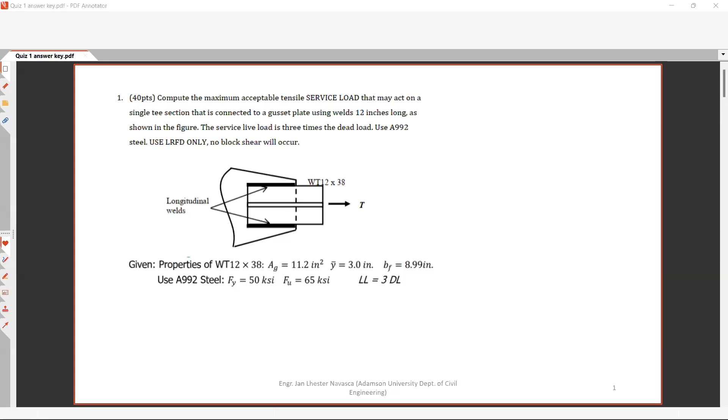Okay, so for situation 1, compute the maximum acceptable tensile service load that may act on a single tee section that is connected to a gusset plate using 12 inches long, as shown in the figure.

It was assumed that the service live load... what do you mean by service live load? The service live load, no factor, our live load, is assumed to be 3 times the dead load. Using A992 steel, using LRFD, assuming no block shear will occur.

This is true, there is no block shear that will occur. Okay, this is the assumption.

So, given properties, we have WT 12 by 38. Again, WT12, the 12 here is the depth of your WT, and the 38 is the unit weight per linear foot of your section. This has a unit of pounds per feet. So this means that this is 38 pounds per feet.

And you have a gross sectional area of 11.2, a Y bar of 3.0, BF of 8.99. A992 steel, Fy equals 50, Fu equals 65, and the assumption of LL equals 3 times dead load.

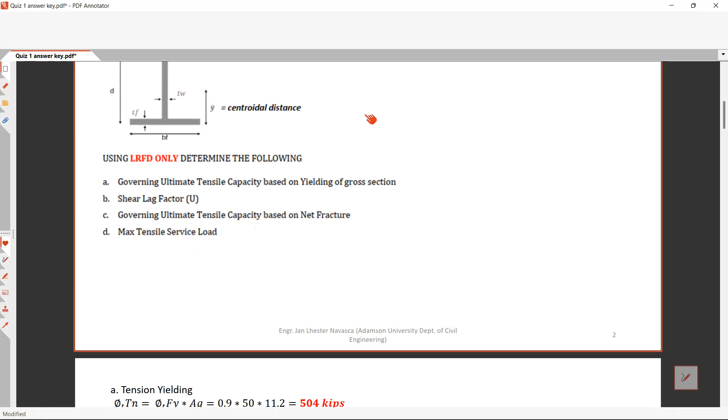Just find Fy, what is Ag, what is phi sub T, and directly you'll get the answer. Why did you still make mistakes here?

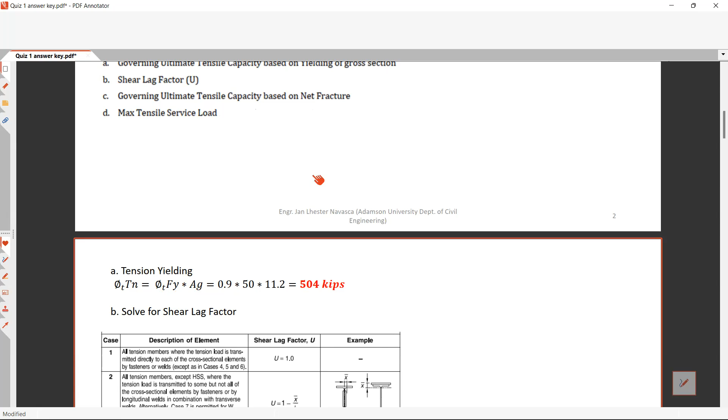So, phi Tn, tension yielding limit state, check your modules. Did you review? You have this phi in LRFD, assuming you are using LRFD.

Using LRFD, your phi in yielding is 0.9 and your phi in fracture is 0.75. So again, FY times AG, your FY is 50 KSI, your AG is 11.2, you get 504 kips. So that's a direct solve for problem A.

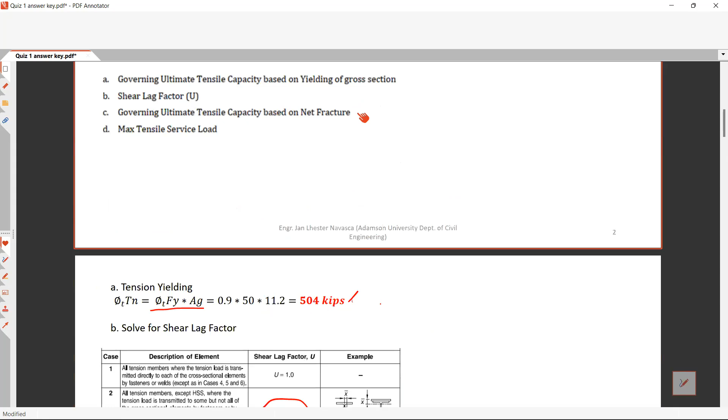For problem B, most of you use this 1 minus X bar over L. But this 1 minus X bar over L is not the shear lag factor that should be used here, because you have welded connections.

You have welds, and if you check the handouts that I've given to the class, you can see this case 4. There's a drawing here on the side. You have this example, and this example is exactly the same as your quiz.

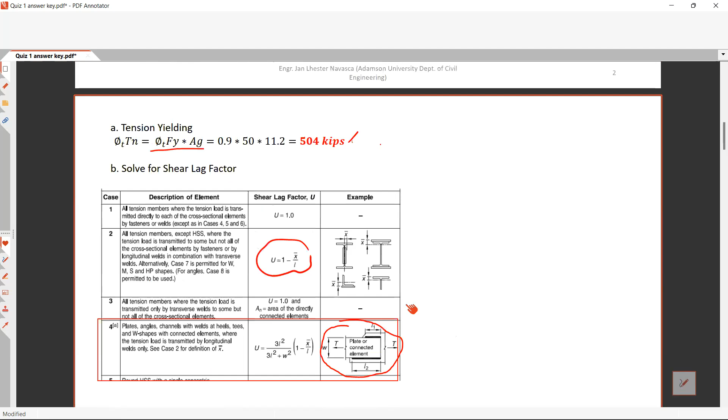That is exactly the same as your quiz. So you have angle plates, angle channels with welds at heels, tees, and W shapes, connected elements. You have this equation, so you will be using this equation.

Using this equation, just find what is L and what is X bar. Most of you got the L and X bar correctly. Your X bar is 3, that is also Y bar, 3 inches - that's the centroidal distance. And the length of connection is L.

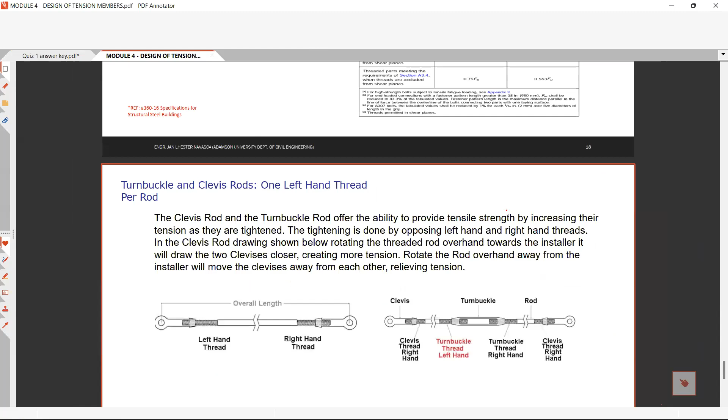If you check your handout - let me open the handout - designing tension members. If you check your handout, when welded, your L is this one. If they have different lengths, simply use the average.

That is why your L is 12 inches, since you have a 12-inch weld, and your X bar is 3 inches. That is why, plugging into the shear lag factor equation, you have 1 minus 3 over 12, multiplied by 3 times 12 squared over 3 times 12 squared plus 8.99 squared.

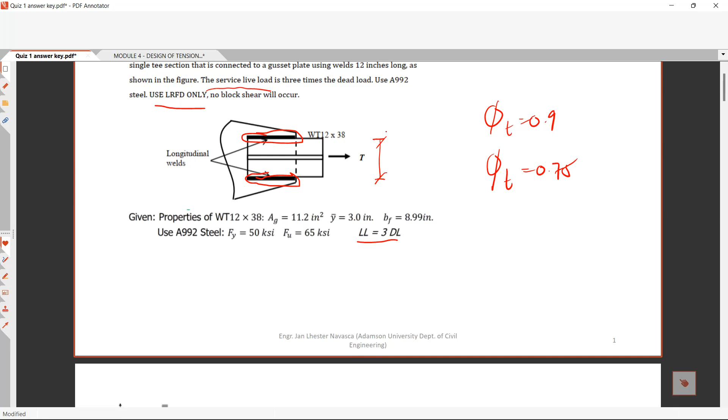What is W? Your W is the width perpendicular to the loading direction, that is BF, which is 8.99. If you look at the drawing, this is the loading direction, T, and this is W.

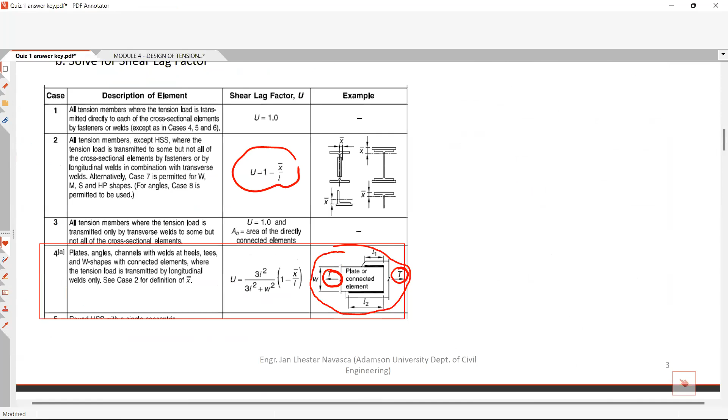So this time, you have this W, 3L squared plus W squared, times 1 minus X bar over L. Then you have this equation for the shear lag factor, which equals U equals 0.632. So now you have your A and B.

Now, what is the tension fracture, or what is the ultimate tensile strength in fracture? Again, your phi T is equal to 0.75 using LRFD.

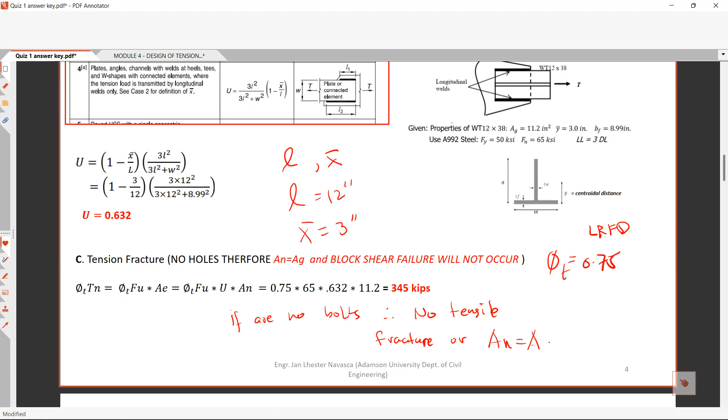Okay, so no holes. Again, as I said repeatedly in the lecture, if there are no bolts, take note, if there are no bolts, therefore no tensile fracture, or your AN is equal to your AG, okay? Your net area AN is equal to AG, and block shear failure will not occur.

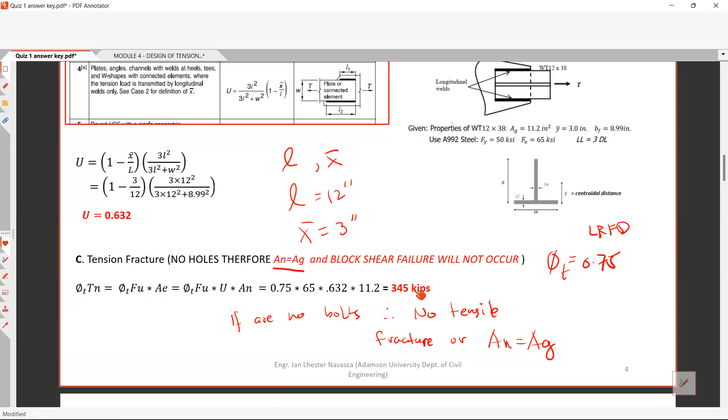This is the assumption. So you have 0.75 times 65 times the shear lag factor U times AN, which is 11.2, your AG, you get 345 kips. Okay, that is the tension fracture.

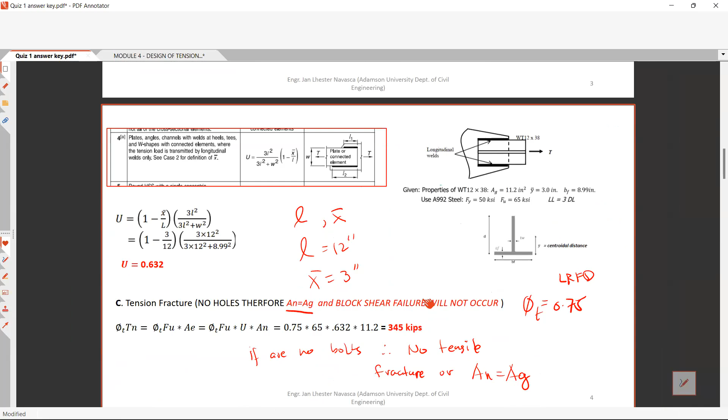Then the next problem is, what is the governing service load? Okay, going back to your two limit states, yielding and fracture. So for yielding, you have 504 kips, and based on fracture, you have 345 kips. Okay, therefore, choosing between the two limit states, we will choose the capacity with the smallest value.

So we'll be using 345 kips for the capacity based on LRFD. Okay, so it's simply equating the demand to the capacity. This time, this is your capacity, so we are solving for the demand. Again, the problem states that we will be using LRFD, so therefore we will use LRFD load combinations for the demand. Given that dead load and live load, you have these two load combinations.

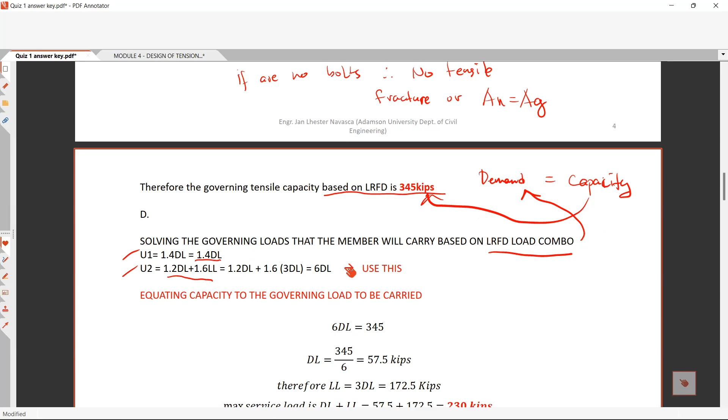You have U1 and U2: 1.4 times dead load, and 1.2 plus 1.6 times live load. Okay, then plugging in the assumption that your live load is thrice your dead load. Okay, so this is the assumption: the service live load is 3 times the dead load.

Therefore, plugging in, you have 1.2 times DL plus 1.6 times 3DL. You get this equation, 6DL, in terms of the load combination U2, 6DL in terms of dead loads. So comparing 1.4 DL versus 6DL, if you recall, for demand we will choose the maximum. Therefore, we'll be using the 6DL.

Now, equating the demand to the capacity, you have your 6DL equals 345. You get your dead load to be 57.5 kips. Therefore, 3 times the dead load, that is your live load, is 172.5 kips.

The question is asking what is the maximum service load. If you recall, the service load is simply dead load plus live load. It's simply 57.5 plus 172.5. You get 230 kips for the maximum service load.

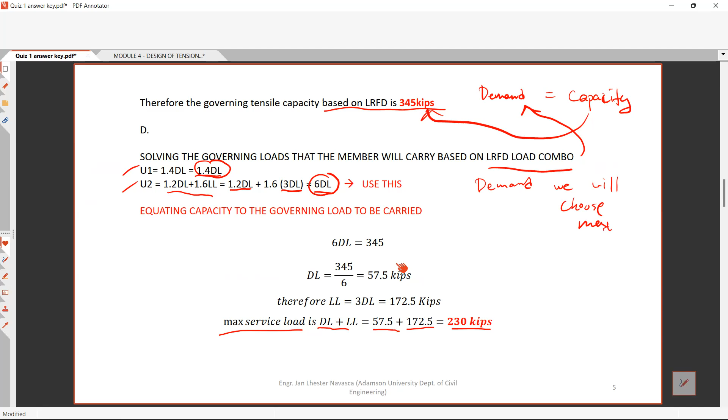Okay, so I think it's not that hard. So do you have any questions, class? Any clarifications for this problem? None so far, sir. Okay, I hope so.

Okay, Situation 2. Okay, someone also made a mistake here. So this situation 2 is almost the same as the given example in design of tension members. So I wonder why some still made a mistake solving this type of question.

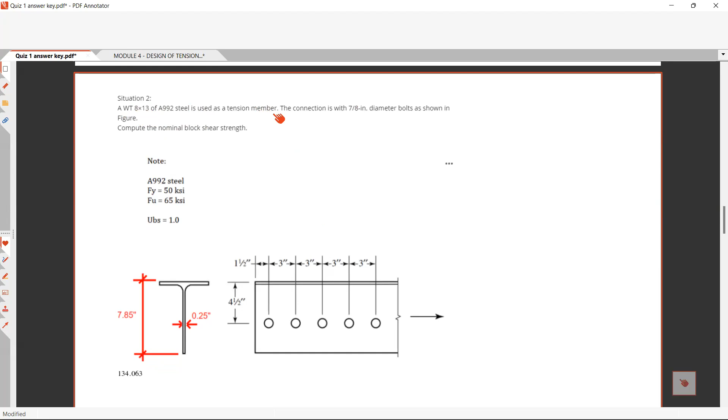Okay, WT 8 by 13, meaning you have your 8 by 13 WT section with A992 steel as the tension member. Okay, the connection is for 7/8 inch diameter bolts. So as shown in the figure, compute the nominal block shear strength. Okay, so we have this A992 steel, we have your FY, FU, and the assumptions UBS. Given the section, the answer is 134.063. Okay, how do we solve this type of problem?

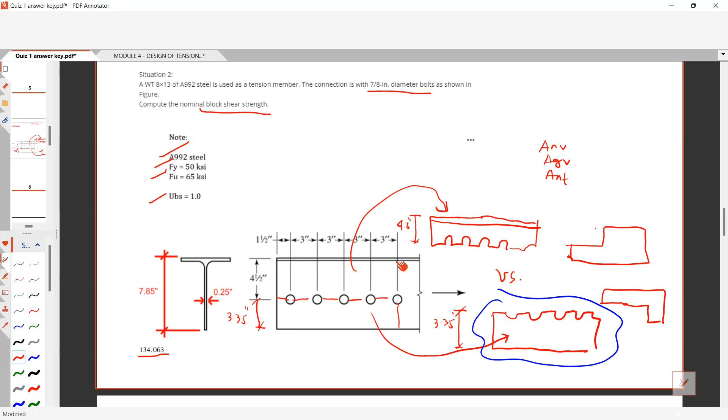So therefore, this is the block shear. This is the block shear that will occur. This is the governing block shear. Then for the solution, the shear area for AGV is just simply taking this total length.

So again, your thickness is 0.25. You have this length 1.5. So you have 1.5 plus 3, 1, 2, 3, 4, four times 3 inches. That is 13.5 inches. This is 13.5 inches.

That is why you have your AGV to be 3.375. Next, there are 4.5 hole diameters. You have 1, 2, 3, 4, and the last hole is torn off by its half. So it will tear off at the half.

Therefore you have this area, AGV, which is this one, minus the 1/2 hole. There are 4.5 hole diameters. You have your 4.5, then the hole diameter is dB plus 1/8 equals dH. Therefore you have this 2.25 square inches.

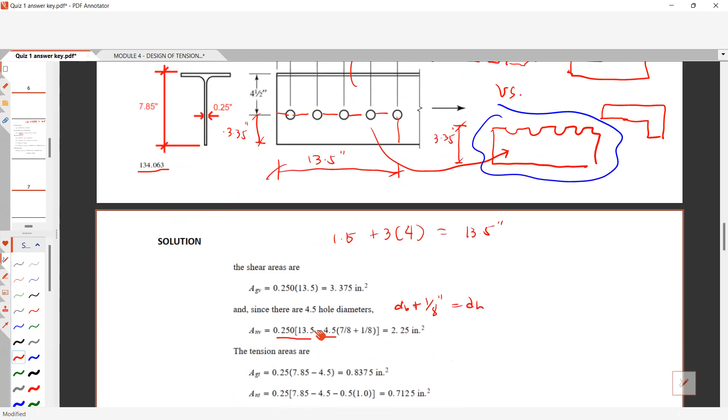And then for the tension area, it's just simply AGT, which is 0.25. You have your 0.25 thickness times 7.85, minus your 4.5.

Or this one is just simply 3. We solved this earlier, this is simply 3.35 inches. So 3.35 inches minus 1/2 of diameter of the hole. So 3.35 inches minus half of diameter of the hole, you have this 0.5 times 1. Again, in 3D, this is how it looks.

2, 3, 4, then the last is half. This one, this one.

This is the shearing area again. This one is ANT, and this is your, and this half area is your AGB. This one, this one.

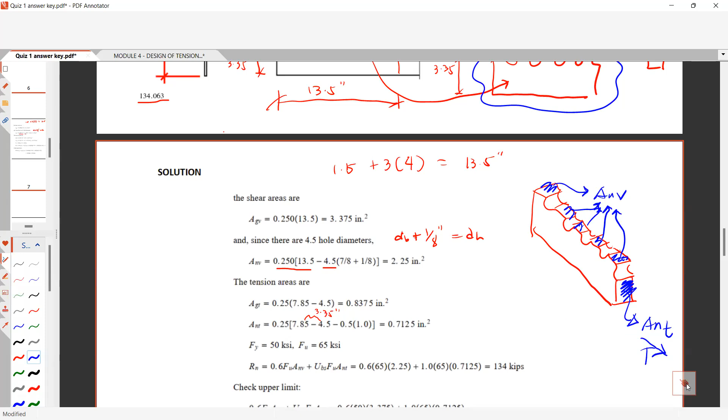So you have a force T over here. That is this one. Again, you have your ANT to be 0.7125. The thickness of this one is 0.25 inches.

So for the FY and FU, you have 50 KSI, 65 KSI. Therefore, your RN is 0.6 FU ANV, plus UBS FU ANT. You have this 134 kips.

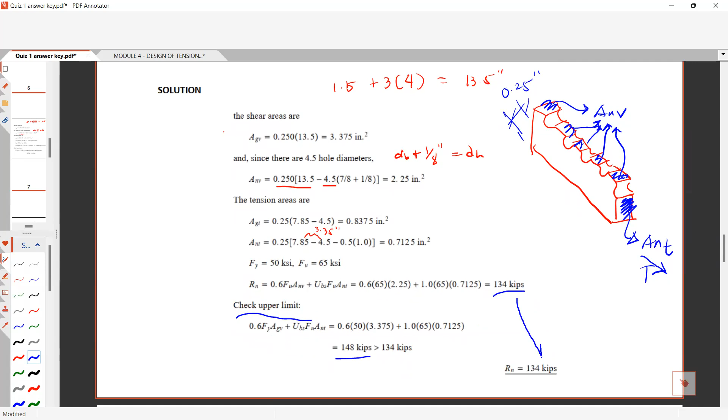Then checking for the upper limit, you have 0.6 FY AGV, plus UBS FU ANT. That is 148 kips. Since your value of Rn is less than the upper limit, therefore we'll be using this 134 kips. That is why you have your Rn to be 134 kips.

Again, the problem is asking for nominal. Therefore nominal means no resistance factor, or no factor phi or gamma, omega for ASD. So this phi is for LRFD and this one is for ASD. No factor of safety, in other words.

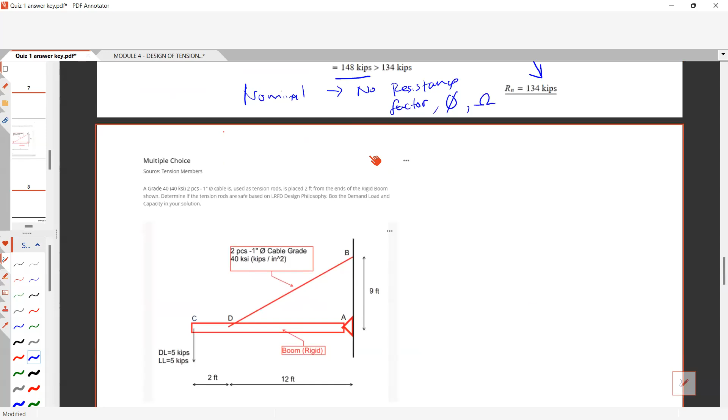Next problem is this one. This is the easiest problem in your quiz. Using your grade 40, or 40 KSI, 2 pieces of 1 inch diameter cable, this one serves as your tension rods.

It was placed 2 feet from the ends, using this rigid boom. Determine if the tension rods are safe based on LRFD design philosophy, and box your demand, load, and capacity in your solution. Then solving for this one.

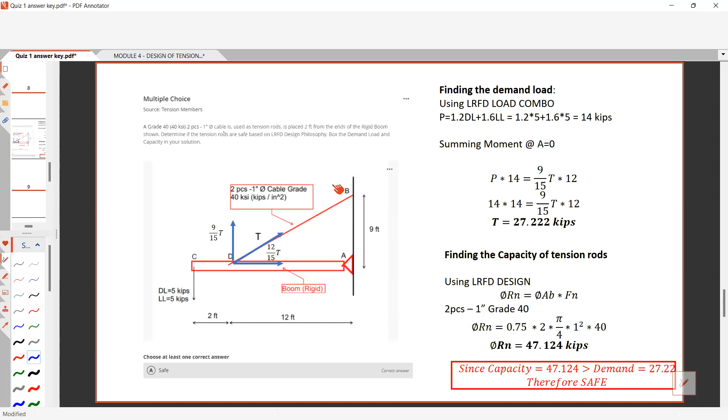I know you can do summation of forces. So find the tension T, that if you cut a section here, the tension T will come out. And that tension T has two components: you have this 12 over 15 T and 9 over 15 T.

Where did the 15 come from? It's just simply the hypotenuse of 9 and 12. So I know you can understand this horizontal and vertical components. Then again, using the finding the demand load and using the LRFD load combinations.

You have this 1.2 dead load, 1.6 live load. Therefore, you will be using 14 kips. So therefore, this assumption is 14 kips when you use the LRFD load combinations.

Then summing moment at A equals 0, since this is a hinge connection. So summing moment at A, you have this P times 14, and this vertical component of T is the only one that has moments about A. Therefore that is 9 over 15 T times 12. Then solving for T, you have this 27.222 kips.

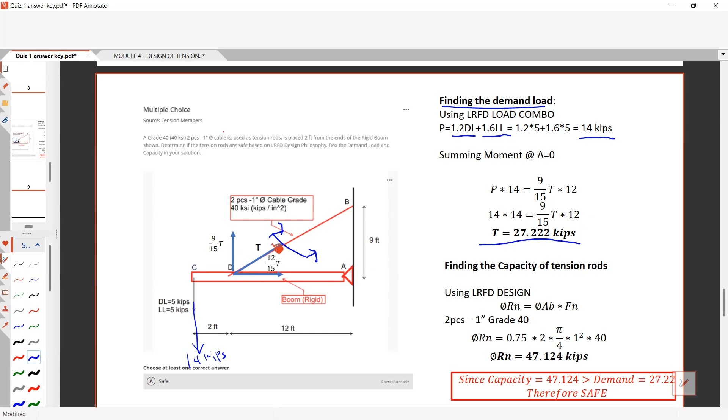Meaning that the tension for the 2 pieces of cable is 27.222 kips. Then solving for the capacity for the tension rod, if you're using LRFD design, this one, the tension rod in our module 4.

Okay, so Rn, Fn, AB for phi 0.75, given the Fn which is 40 ksi. Therefore phi AB times Fn, 2 pieces 1 inch diameter grade 40, 0.75 times 2 pieces times the area of the tension rods or the cables multiplied by the Fn which is grade 40. Therefore you will have 47.124 kips.

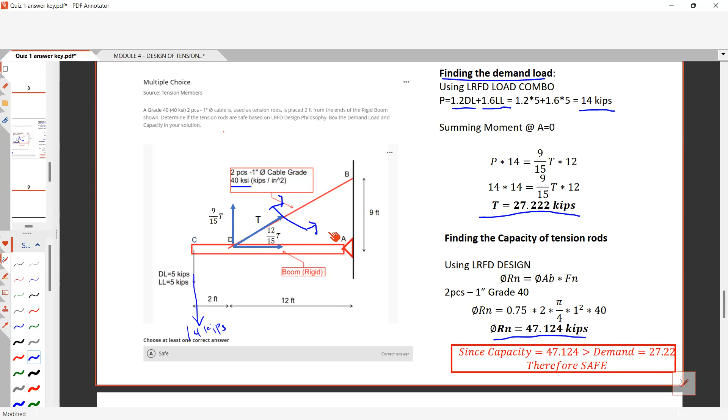Now comparing the capacity to the demand, since the capacity is greater than the demand load, therefore your cables or your tension rods is safe.

Okay, last problem: you have this channel bar C6 by 13 used as a tension member. The holes are for 5/8 inch diameter bolts using A36 steel with Fy equals 36 and Fu equals 58. The gross area is given and assume U equals 0.85. Using LRFD, what is the design? Tensile rupture or fracture, LRFD again.

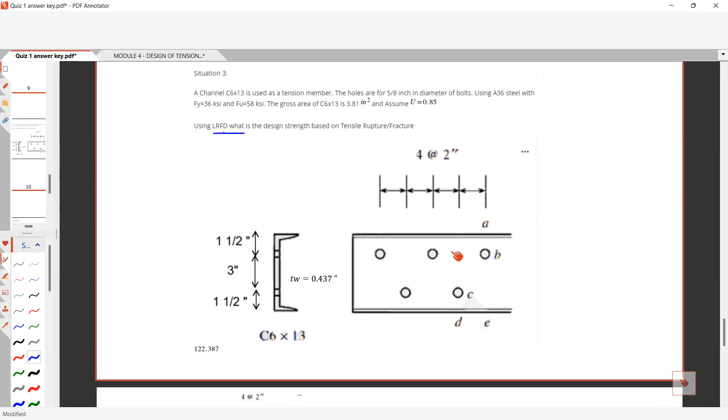Okay, given the setup, you have this staggered connections. If you have staggered connections, therefore your An is equals to Ag minus the area of the holes plus the correction factor, which is summation of S squared over 4G times thickness. Sana naalala niyo to.

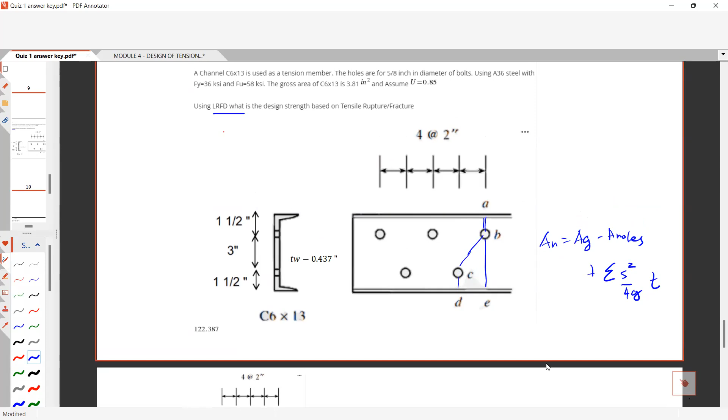You have this staggered connections. Kaya kung meron letters dito, that is why I have letters. Gusto kong magbigay sa inyo ng hint, yung mga loading path. So we have this loading path. Considering the bolt hole diameter, that is 3/4 inches. So solving for line ABE, the line ABE is this one, ABE.

So simply An is equals to Ag minus the area of the hole, which is T W times D. You have this An. Then considering the line ABCD, which is ABCD. So now you have a diagonal fracture, this one, diagonal fracture.

Therefore you will be using summation of S squared over 4G, or the correction factor. So you have this load T. This is your S, and this is your G. So that is why you have this TWD for the hole at B, TWD prime for the hole at C. You have this 3.81, which is your Ag, minus TW for the hole at B. This one is for the hole of B. This one is for the hole of C. And the correction factor, summation of S squared over 4G.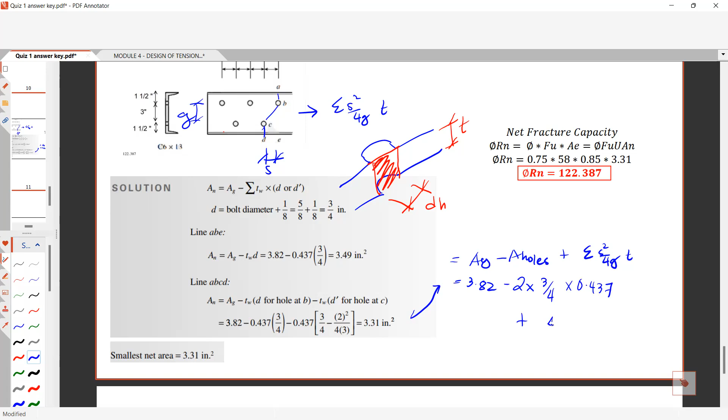Okay, so this one, for example, this is again the area that will be used, this area over here. This is the diameter of the hole, and this is the thickness. So that is why your 2 times diameter of the hole, which is 3/4, multiplied by the thickness 0.437, plus how many diagonal fracture? You have this only the line BC. Therefore you have S squared, which is 4 squared... you have 2 squared, your S is 2, over 4, your gauge distance is 3, then your thickness is 0.437. You have this value 3.31.

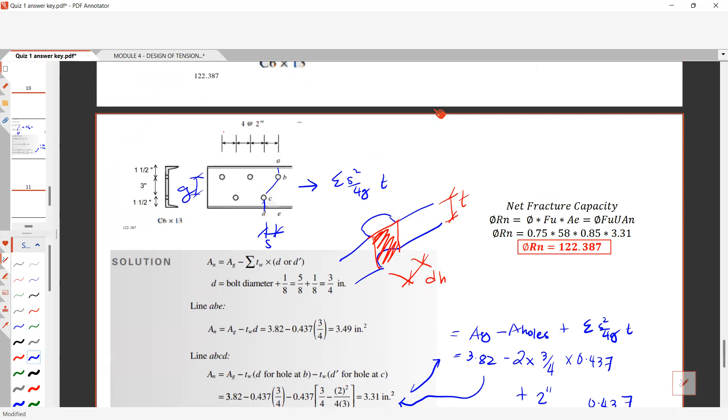Now considering the smallest net area, comparing the line ABE versus the line ABCD, the smallest net area is 3.31. Therefore the net fracture capacity is Phi times Fu Ae. Your Ae is U times An. You have your An, which is 3.31, this will be your net area. Then you have your assumption for shear lag factor, which is 0.85. You have the value Rn equals 122.387 kips.

Okay, so do you have any questions? This is designing, sir, tension member only. Okay, ano yan?

Tanong lang din po, sir. Ano po yung pinagkaiba, sir, sa formula na Wn equals to Wg minus yung diameter of holes minus number of stagger. Ano po yung pinagkaiba nun?

Okay, yung pinagkaiba doon, okay, for the sake of Mr. Ong, the difference between that net width, okay that is for net width, and this one is net area, An. So net width is just simply your An divided by the thickness. Kung mapapansin niyo class, lahat yan may thickness.

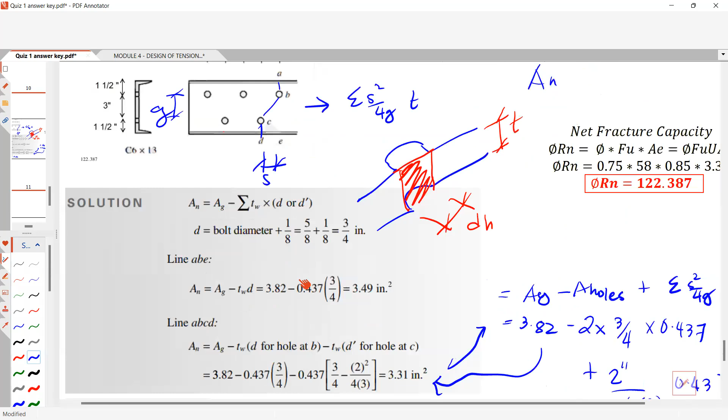Parang finactor out lang yung thickness. Finactor out yung thickness. Okay, yung sa Ag mo may thickness din yan. So that is net width. So in other words, they just have a relationship, or they are almost the same, since net width is finactor out lang yung thickness.

Okay, so you just took the length. You just took this length. What is the length from A to B? What is the length from B to C? What is the length from C to D? Net, meaning this part with the hole, based on my drawing, A to B, B to C, and C to D. Then you just multiply it by the thickness.

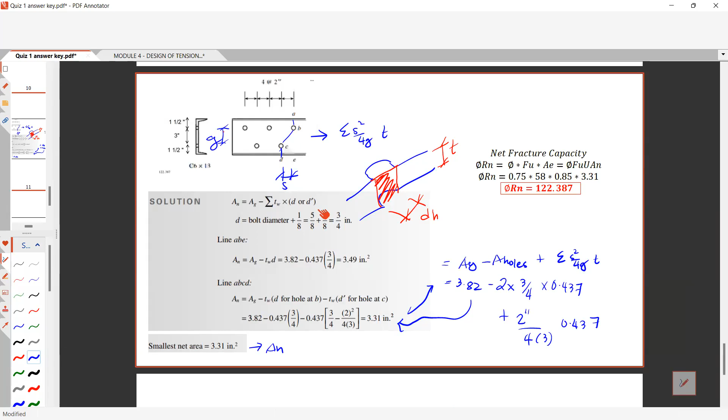Okay, but you can easily check this on C6 by 13. If you try, let's say, this one, C6 by 13 dimensions.

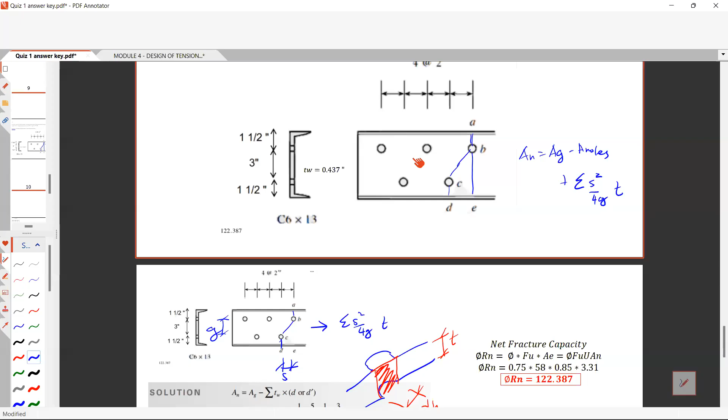You can easily check in the internet the web thickness, 0.437. So I think it doesn't matter if I included it or not. You can easily, if you really know what to use in the formula, check the C6 by 13 dimensions and properties. So I will still consider this situation 3 problems.

Okay po, sir. Thank you.

Okay, but sure, so that you won't have a hard time, please message me if I forgot something to add, but you can check it on your own if you use this one, if you just search for the name of the section.

Okay, any more questions, class, before we move on to designing compression members using Euler's formula?

Will you upload this discussion also in the Google Drive, sir? This one, the discussion of our quiz.

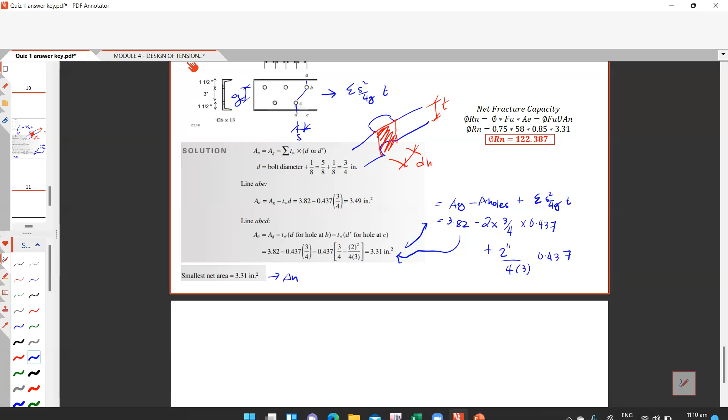Okay, let's move on. We only have 40 minutes left. Okay, so for module 6B, module 6B, example problems on Euler's buckling stress.

Again, this Euler's buckling stress is only the basis of designing an LRFD or the recent codes. Okay, so many designers today are still using this theory. Even in the board exam, they still give these problems, even though this way of designing Euler's buckling stress is already old.

Okay, so in summary, in our discussion last meeting, okay, the critical compressive stress or the Euler buckling stress is given by this equation: pi squared E over KL over R squared, this is your critical compressive stress. Again, this is stress. So if FCR is greater than Fy, your limit state is yielding.

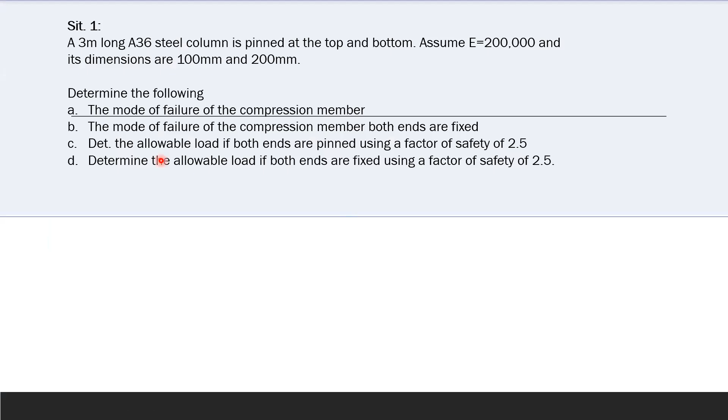Again, we have 3 meter long and 100 by 200 dimensions. The first assumption is both ends are pinned, so that is why you have your fixity factor that is 1.0.

Then solving for letter A, according to the problem, what is the failure mode? In order to solve for mode of failure, you just need to find the governing slenderness ratio. Solving for slenderness ratio in X, you have KL over Rx, which is 1.0 times 3,000 over square root of I over A. Your inertia is BH cube over 12.

If you recall, the inertia of a square or rectangle is BH cube over 12. This is your inertia in X, and your area is BH. So you have 100 by 200 cube over 12, and your area is 100 by 200. Therefore your slenderness ratio in X is 51.962.

Then solving for the slenderness ratio in the y-axis, you have KL over Ry, so 1.0 times 3,000 divided by square root of Iy over A. If you recall, the inertia in y for a square is b cubed h over 12. So you have 100 cubed times 200 divided by 12, divided by the area which is 100 by 200.

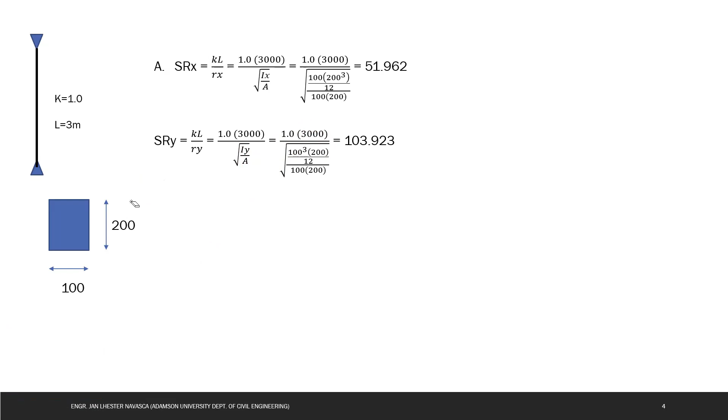Solving for FCR, which is the given problem, what is the mode of failure? FCR is pi squared E over KL over R squared, using the governing slenderness ratio. So your FCR is pi squared E over KL over R squared, which is 182.77. The governing slenderness ratio is the maximum slenderness ratio for X and Y axis.

So we will choose the maximum. Okay, this one. Therefore, your FCR is 182.77.

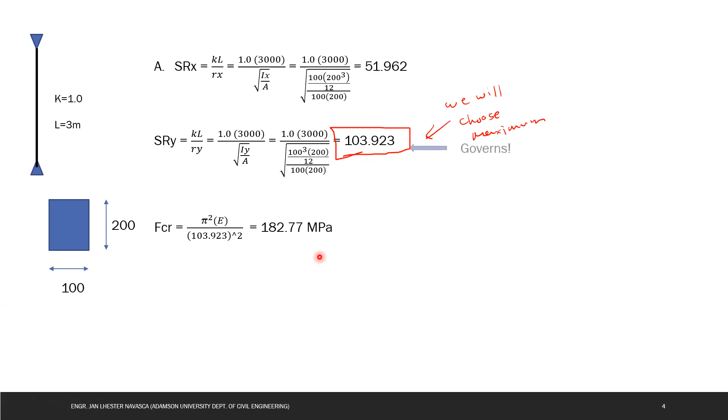If you recall, the Fy for A36 is 248. So basically, how to convert KSI to MPa. Given the problem, your Fy is equal to 36 KSI. To convert 36 KSI to MPa units, just multiply it by 1,000 and divide by 145. So 36,000 divided by 145 is exactly Fy equals 248 MPa.

Since the Euler buckling stress is 182.77, and that is less than the yielding stress, therefore the buckling stress will happen first before the yielding of the cross section. Therefore, the limit state is buckling. So that is why you have this answer: your limit state is buckling.

Next problem, what is the limit state if both ends are fixed? If you recall, the fixity factor if both ends are fixed is K equals 0.5. Then solving for the slenderness ratio in y and x, you have 0.5 times 3,000 square root of Iy over A, giving 51.962.

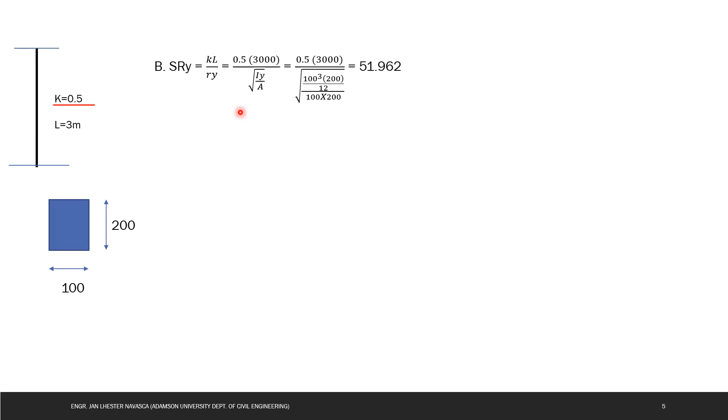No need to solve for SRX because we all know that SRY will govern. So that is the slenderness ratio in y that we solved. Then solving for FCR, pi squared E over KL over R squared, you get 731.068.

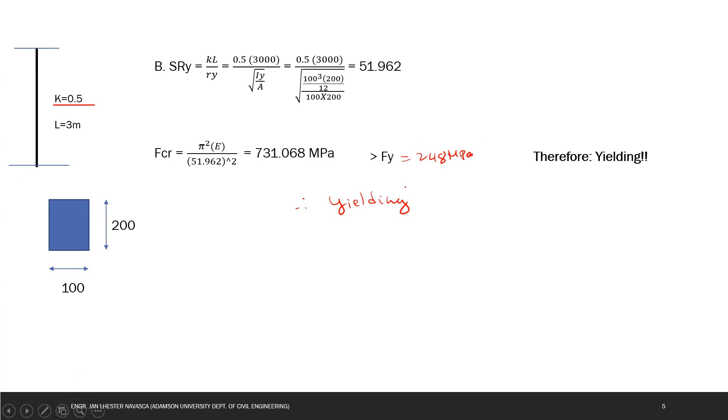Now comparing this critical buckling stress based on your Euler formula, that is greater than Fy, which is 248 MPa. Therefore, yielding will happen first, or the column will yield, and maybe the column will not buckle if the stability of the column is not enough. Therefore, the limit state will be yielding.

So it's like that, just check which happens first, whether buckling based on Euler buckling stress, or yielding based on Fy given in the properties.

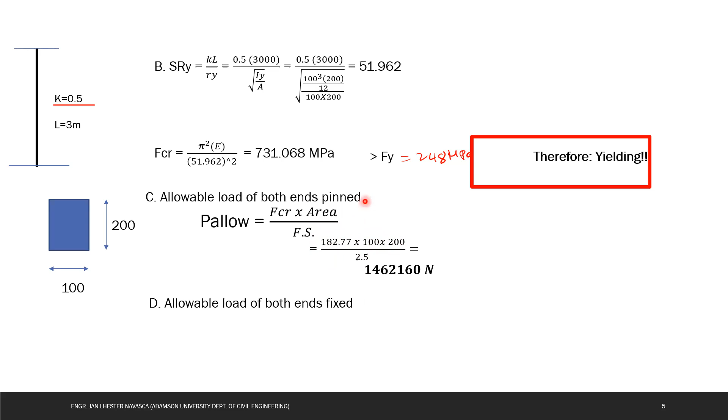Next problem is problem C: what if both ends are pin? What is the allowable load? So basically, you have your FCR times area divided by the factor of safety. That is your allowable load using a factor of safety. So you have the FCR given in problem A, the governing FCR if both ends are pinned, which is 182.77, multiplied by the area, divided by the factor of safety, giving 1,462,160 newtons. Then allowable load if both ends are fixed.

So again, the governing stress is Fy since yielding is the limit state of column if both ends are fixed. So Fy times area divided by Fs, you have 1,984,000.

Additional question: given these two allowable loads, with the same factor of safety, we will choose this one because this will give us a lower value for the capacity.

So next problem, situation 2, given in a past board exam: an 8-meter long steel column is pinned at the top and fixed at the bottom. The column is provided with lateral support at the mid-height in the weak direction. Take note of this problem. According to the problem, the designer provided a lateral support at the mid-height for the weak direction.

Using the Euler critical load PC equals pi squared EI over KL squared, and the properties of the column: IX equals 178.1 times 10 raised to 6, and IY is 18.8 times 10 raised to 6, and your area A is 8129 square millimeters. What is the critical effective slenderness ratio? Calculate the critical load PC. And determine the minimum length of the column for which the Euler's formula is valid if the proportional limit of the steel is 320 MPa.

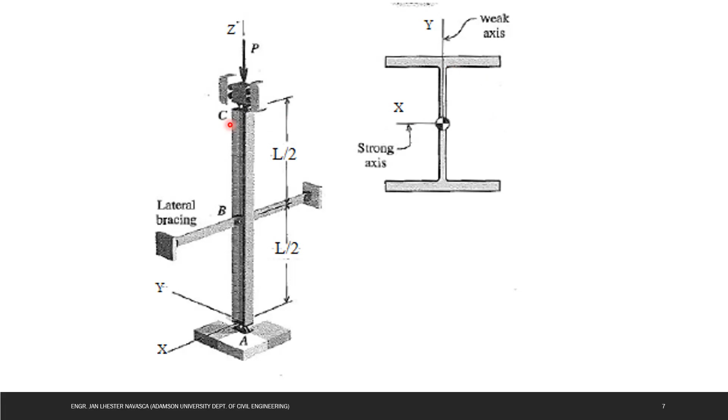Using these assumptions, if you check the direction in X, if you check in the direction of the X-axis, you will see this height of 8. And if you check for the Y-axis, you can see this length also. If you check in the Y-axis, you can see this figure, you have this lateral bracing.

In the X-axis, your lateral bracing is simply a point over here. But in the Y-axis, you have this lateral bracing. So your lateral bracing for the length in the y-axis is divided into 2, since it is at mid height, 4 and 4.

Solving for the slenderness ratio in X, KL over Rx, take note of the K. Your K is fixed and pin for the x-axis. Therefore you have 0.7 times 8,000 over Rx, where Rx is square root of I over A. You get 37.833.

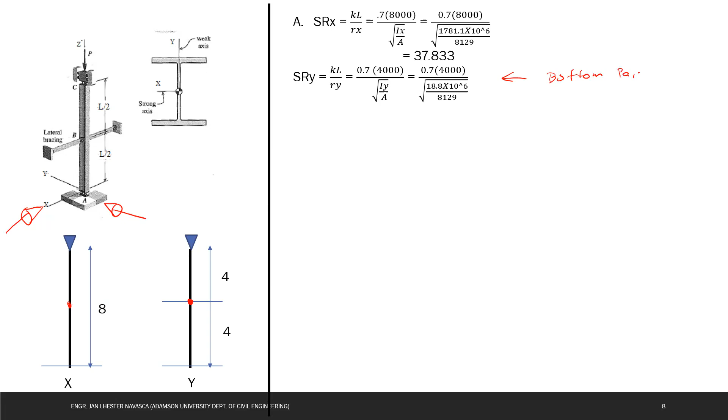Now solving for Ry. The lateral bracing always provides a pin connection. So for the bottom part, you have pin and fix. And for the upper part, you have pin and pin.

Solving for the bottom part, 0.7 times 4,000, that is fixed and pin, square root of I over A, you have 58.223.

Then solving for the upper part, or the other half, both ends are pin-ended connections, this is pin, this is pin. You have 1.0 times 4,000 over square root of I over A, you get 83.176. For all these slenderness ratios, in X and the bottom and upper parts of the Y-axis, you will choose the maximum slenderness ratio. Therefore we will be using 83.176. This is the governing slenderness ratio.

Then what is the critical Euler's buckling load PCR? Given the formula, FCR times the area of the cross section, or simply pi squared EI over KL squared. So you have pi squared E, then your 83.176 squared, times 8129, which is the area of your cross section given in the first problem.

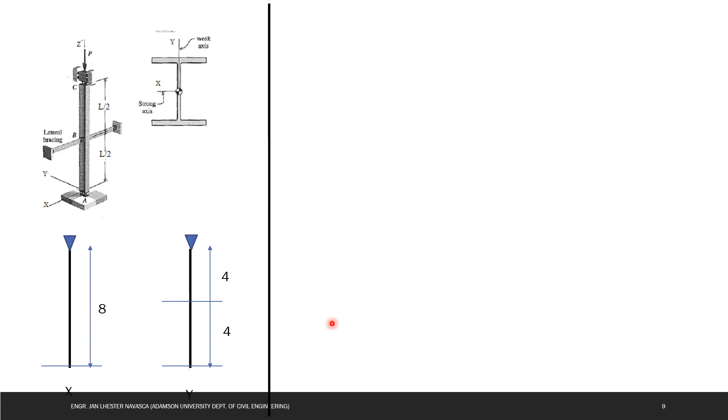Next is solving for the problem. What is the length given that the Euler buckling stress limit is 320 MPa? Determine the minimum length of your column for which Euler's formula is valid if the proportional limit of the steel used is 320 MPa.

Meaning, class, the critical Euler stress should be equal to or less than 320 MPa. So the question is asking what will be the length of your column given that the FCR, or the Euler's buckling stress, should be equal to the Fy, or the yielding strength of your steel. So basically, just equate the Fy, or the proportional limit, to your Euler's buckling stress FCR.

So solving for KL over R. Since we all know that the governing slenderness ratio happens at this portion, that is why we'll be using this as your KL over R. So this will be the basis of our KL over R on the slenderness ratio. So square root of pi squared E over 320.

So where does this come from? Simply derive it. This one should be KL over R squared times 320 equals pi squared E. So KL over R squared equals pi squared E over 320. Taking the square root of both sides, you have this equation: square root of pi squared E over 320.

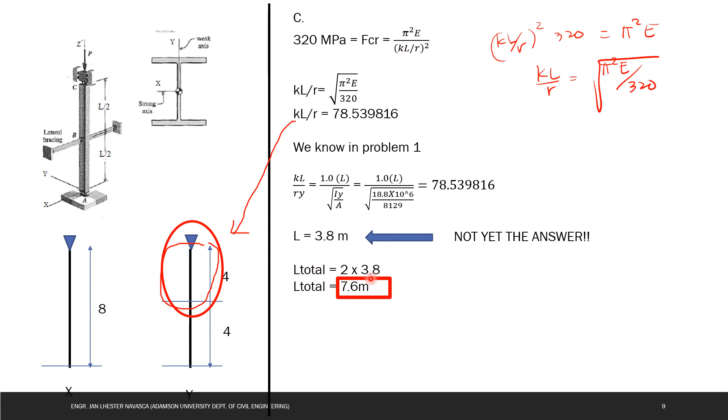Then another example: a W12 by 50 is used as a column to support an axial compression load of 145 kips. The length is 20 feet and the ends are both pinned. Without regard to the load and resistance factors, investigate this member for stability. The grade of the steel need not be known, since the critical buckling is a function of the modulus of elasticity and not the yield stress or the ultimate stress.

So given the problem, you have this W12 by 50. The properties are given: AG equals 14.6 square inches, your D is 12.2 inches, your BF is 8.08 inches, TF is 0.64, TW, RX, and RY.

Then take note, class, please write down this modulus of elasticity of steel. If I say E steel, this is a constant value, so just use 29,000 KSI in English unit and use 200 GPa in SI unit. Please memorize this equation. This is a constant value for the modulus of elasticity of steel.

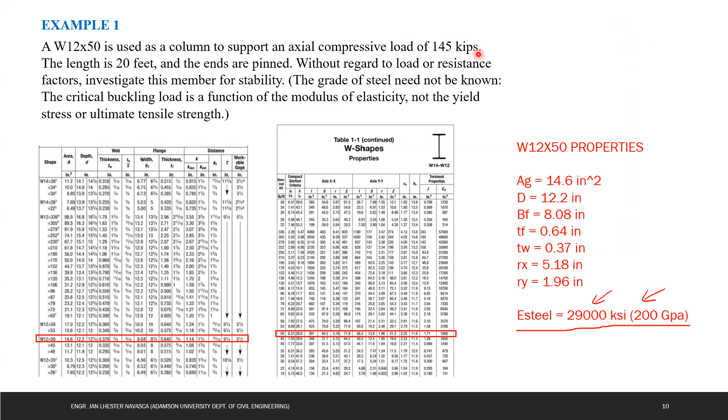So using pi squared EA over KL over R squared, the formula, you have 278.9 kips. Because the applied load is 145 kips, okay, you have 145 kips. We can say that the column remains stable and has an overall factor of safety against buckling, which is exactly 278.9 divided by 145 equals 1.92.

Meaning, the capacity to demand ratio, this one is the capacity, and this one is the demand. So the capacity over the demand ratio is exactly 1.92. So you have this factor of safety, 1.92.

Okay, additional problem, what is the Euler buckling stress? So given the formula pi squared E over KL over R squared, or simply PCR divided by area, you have this 19.103 KSI.

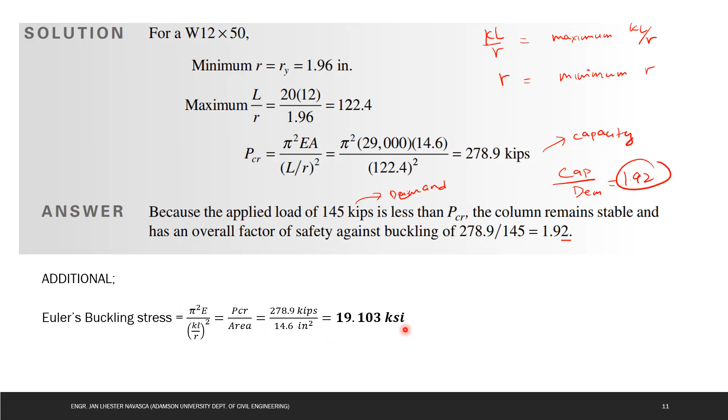For example 2, a steel rod with a diameter of 2.4 inches is pinned at both ends with a length of 5 feet. Determine the slenderness ratio, buckling load, and actual stress due to point load P. So for the slenderness ratio, again, your R is equal to square root of I over A.

For a circular section, recall that the inertia is pi d raised to 4 over 64, and the area is pi d squared over 4, in terms of d, where d is the diameter. Substituting into the equation of R, you get R squared equals d squared over 16, or simply R equals d over 4.

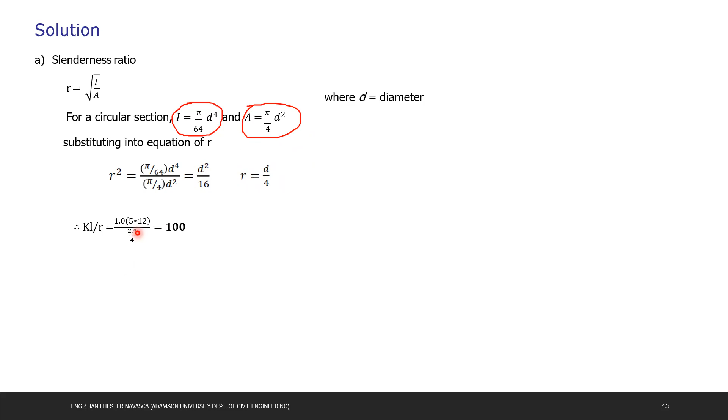So solving for the slenderness ratio, therefore with K equal to 1.0, your L should be in inches because your R is in inches. So you have this 100.

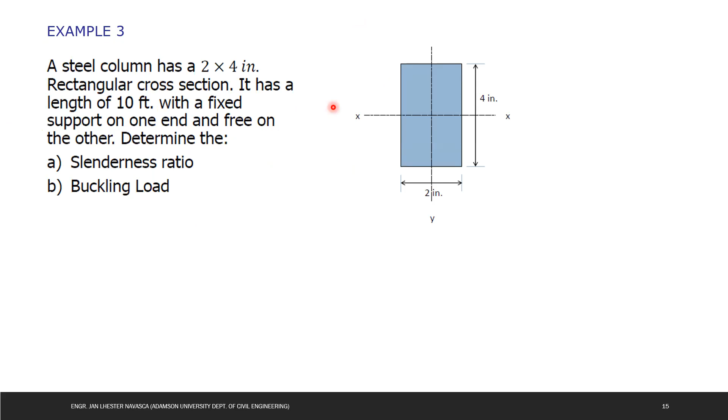For example 3, a steel column has a 2 by 4 inches rectangular cross section. It has a length of 10 feet, with one end fixed and one end free. Determine the slenderness ratio and the buckling load.

So for a free and fixed column, check your handout for the fixity factor K. For free and fixed, K is equal to 2.0. If you recall, for fixed and free, the length of contraflexure or length of curvature is twice, this is 2L.

So that is why K is 2.0, and your L will now be equal to 20 feet. Note that it is easy to observe that Rx is greater than Ry, so the column buckles about the y-axis. So if your basis is R, you will be using the R minimum, or square root of IY over A.

Therefore, that is 0.577. So your slenderness ratio, L sub E over R, or KL over R, is 20 feet times 12, that is K times L in inches, divided by 0.577, you have 415.94. And for the buckling load, just plug into the formula, you have 13.23 kips.

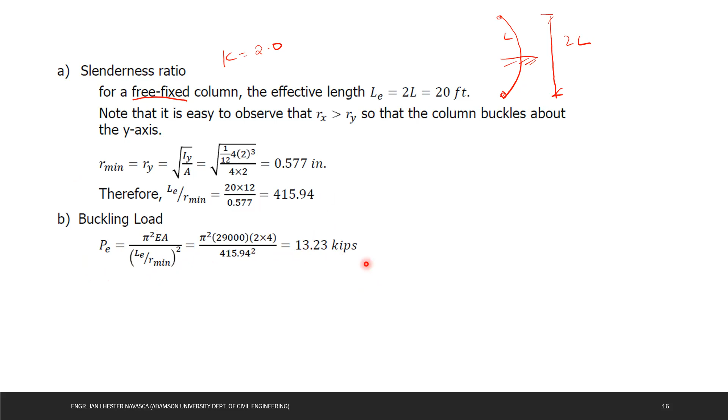Okay, so do you have any questions for Euler buckling stress?

Okay, for the summary, let's go back here. Always keep this equation in mind, this equation right here. For the stress, you have this, and the limits, you have this one.

For axial compression, you have this formula, three formulas. We have formula 1, formula 2, and formula 3. And choosing the slenderness ratio, it's the largest slenderness ratio, and the fixity factor K, your KL is the effective length also.

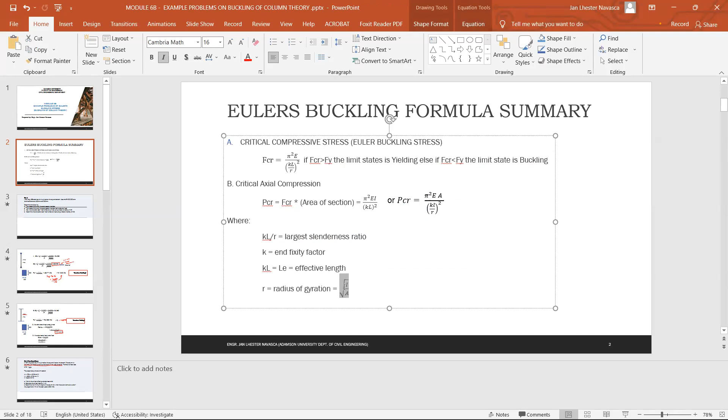For the radius of gyration, you have square root of IY over A. And basically, when you have lateral bracing, just look at the x-axis and look at the y-axis. And the lateral bracing always gives you a pin connection.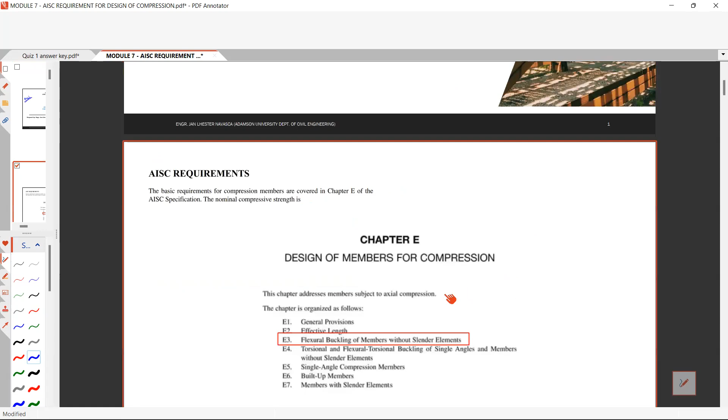Okay, so if you check the AISC requirements, AISC 15th edition, which I already uploaded in our Google Drive, check chapter E, design of members for compression. We have E1, E2, E3, E4, E5, E6, and E7. For this class, since this is a bachelor's degree or undergrad class, we only discuss flexural buckling of members without slender elements.

Again, flexural buckling is a general buckling, hindi siya local buckling. So flexural buckling of members without slender elements. Last meeting I discussed what is slender elements, pero hindi ko na define what is slender elements. We also have torsional and flexural-torsional buckling of single angles and members without slender elements.

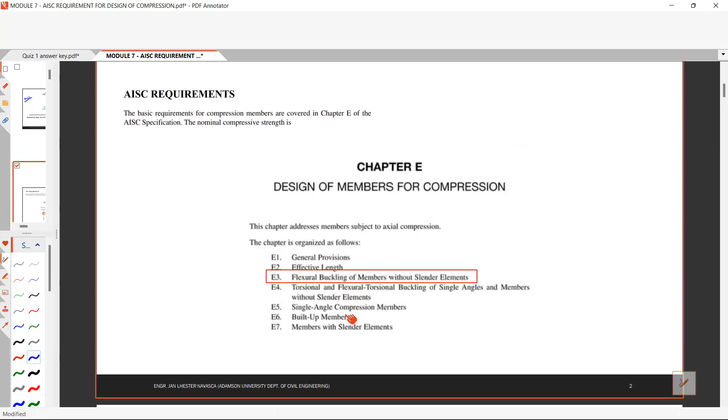And we have the single angle compression members. Also, we have the independent provisions for built-up members and members with slender elements. So if you recall last meeting, the classification of buckling of structural members

is based on general buckling and local buckling. For general buckling, we have flexural buckling, or basically it is the global buckling of a column. However, for local buckling, this will occur when the section has a slender element. Kapag may slender element mo, local buckling will happen.

So as a general rule, if the section has a slender element, local buckling will occur.

So again, we have these two local bucklings, buckling of the flanges or buckling of the webs. Itsura ng buckling of the webs is like this one. So this is the web. Maybe you have this local buckling over here when axial compression is applied. So if you apply load in your column, there is a local buckling on the web.

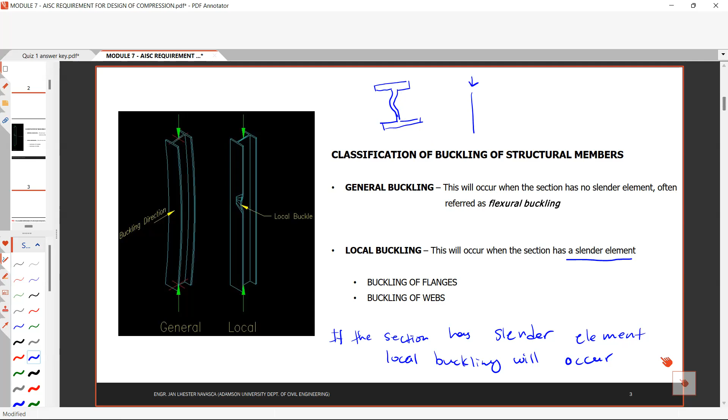So what is local buckling? Local buckling is a sudden deformation of a structural component under load presence. Thus, it has the effect of reducing the load carrying capacity of the columns.

Okay, so para rin siyang ang mga gamit, 'di ba pag may gamit ka na may sira, may defect, medyo mababawasan yung kanyang functionality. So parang ganito rin yung sa columns or sa steel design. If the section has slender elements, the effect of that slender elements will reduce the load carrying capacity

of your columns because there is a reduction in the stiffness of the locally buckled element. We call it local stability. If your column has local stability, meaning stable yung column or your section, therefore no reduction will happen, therefore no local buckling will occur.

Okay, if your section is not having enough local stability, there is a reduction to the load carrying capacity of your column, and maybe local buckling will occur, or the local buckling will occur first.

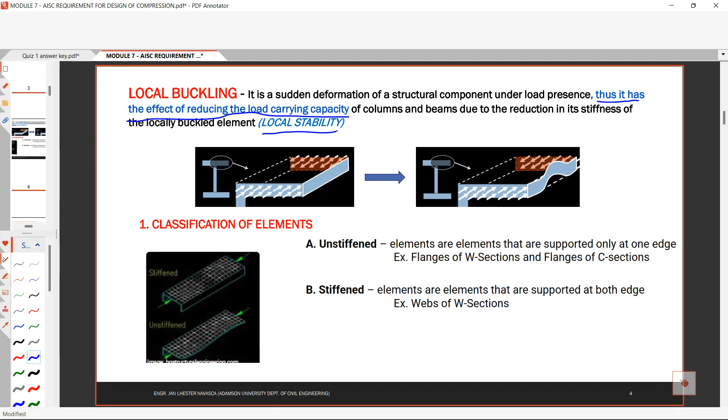Okay, so for unstiffened, unstiffened is elements that are unsupported, supported only at one edge. Meaning, for example, my section is a channel bar. This is my section, channel bar.

Unstiffened elements are elements where only one edge is supported. So for example, we have flanges. The flanges of the C-section, only one support. This element, this is the flanges, I think in red color. This is the flanges of our C-section, and only one edge is attached, meaning one edge has a support.

Another example is the flanges of the W section, just like a beam, if you recall the beam. So for example, this is the flanges of the W section, it has only one support. This time you have only one support. Meaning if you have only one support, that is unstiffened elements. Therefore, we can say that the unstiffened element of W section and C sections are their flanges.

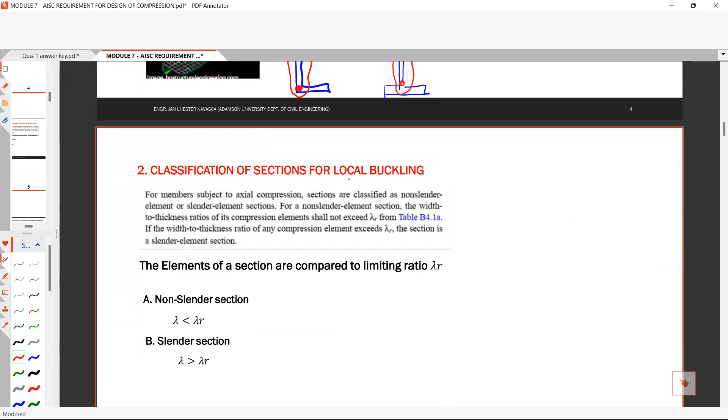Okay, so classification of sections for local buckling. This time, how to know if our column has local instability or local stability, or our section will experience local buckling. So the elements of a section are compared to the limiting ratio lambda sub r.

So we can say that our column or our section is non-slender. For members subject to axial compression, sections are classified as non-slender or slender sections. For non-slender element sections, the width to thickness ratio of its compression elements does not exceed the limiting ratio lambda sub r. And if the width to thickness ratio of compression elements exceeds lambda sub r, the section is a slender element.

So this is the width to thickness ratio lambda, and this is the limiting ratio. So if your width to thickness ratio is less than your limiting ratio, that is a non-slender section, meaning there is local stability, and also no local buckling will happen because you have a non-slender section. You did not exceed the limiting ratio lambda sub r.

However, for the case of a slender section, if your width to thickness ratio is greater than your limiting ratio, you have a slender element, meaning you have local instability, and local buckling will occur.

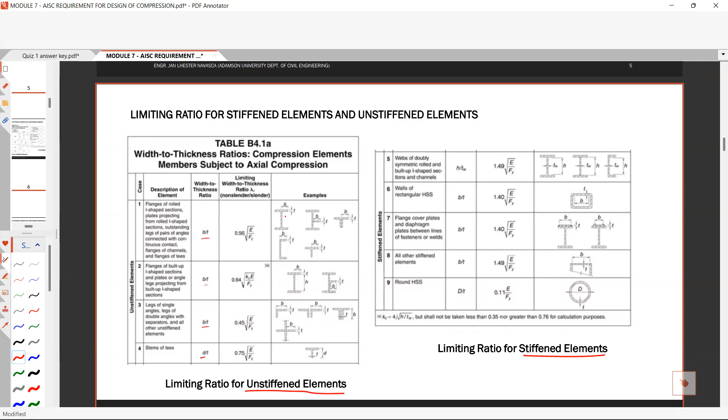The B over T for flanges is half of the flange divided by the thickness. The unstiffened elements of the flange of the W section is the flange. You have this B over T divided by thickness. This is the length of B. And the limiting ratio lambda sub r is given by 0.56 times square root of E over Fy, for this one and this one.

Then for the limiting ratio for stiffened elements, you have this one, h over tw. So h is basically total depth minus your flange thickness minus the fillet, this h. And you also have this, and this one, and this one, and this one.

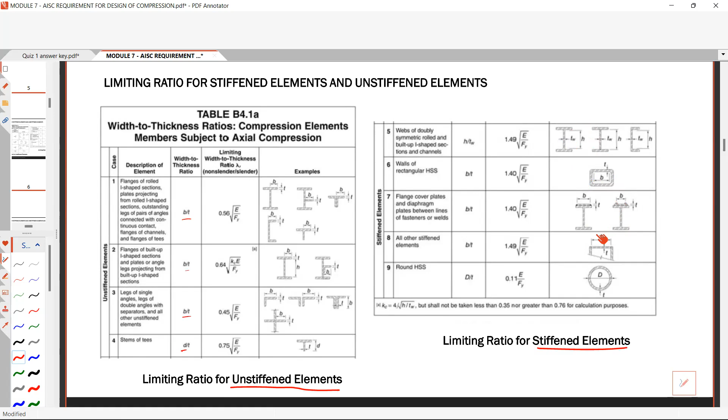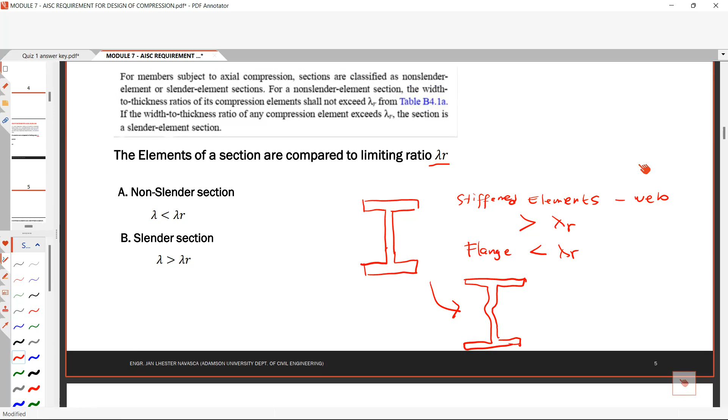So if you find out, let's say for example, you have this section, and you found out that the stiffened element is the web. This one is the stiffened element. Found out that your stiffened element, the web, is slender, meaning greater than lambda sub r, and if the flange is non-slender, meaning less than lambda sub r, that means the local buckling will occur at the web. There is local buckling that will happen in the web if your stiffened element in the web is greater than lambda sub r, or slender.

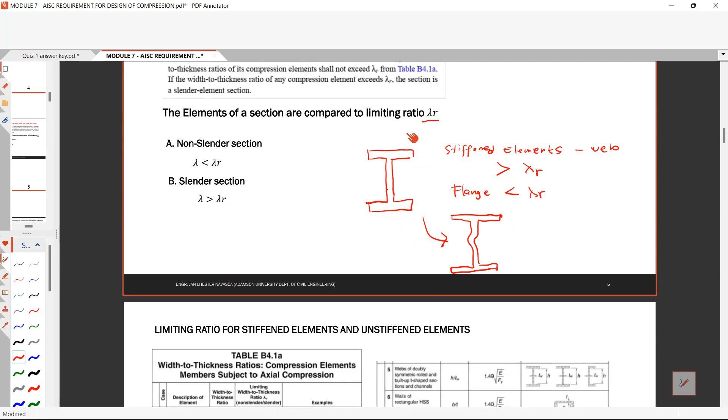So meaning wherever there is a slender section, that is where it will buckle. As a general rule, if the stiffened element or unstiffened element has a slender section, the total cross section is slender. If there is even one slender section here, whether in the flange or in the web, that means the whole section has local buckling that will happen, or has local instability.

So as a summary, using this one, you can also check this summary. So for the flange, for the W section, you have this lambda and the lambda sub r, lambda and lambda sub r. I have this one, lambda and lambda sub r.

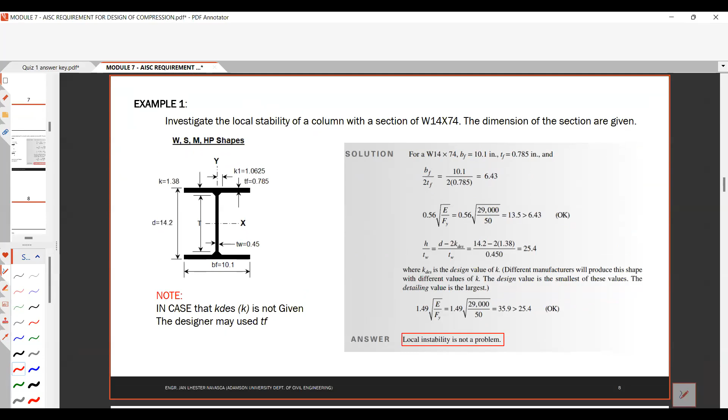So for the last problem before we end our discussion: investigate the local stability of a column with a section W14. 11:58 na pala, okay sorry.